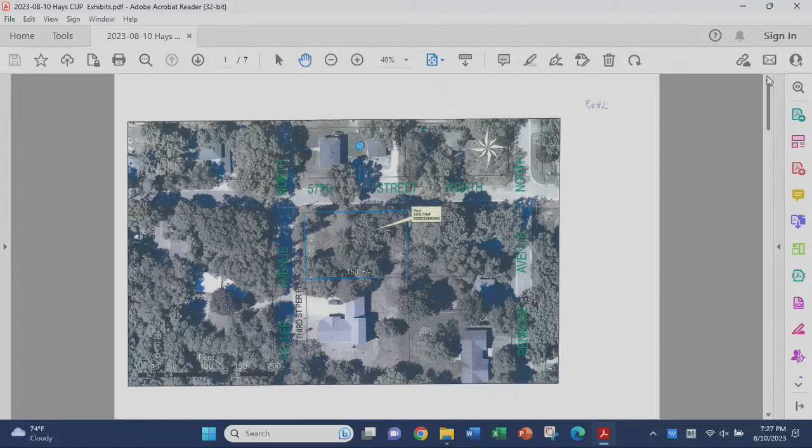Yes, thank you. We do have a request from the Hays for a conditional use permit to allow for front, rear, and side yard setback allowances. This lot is undeveloped and was created by a minor subdivision process. Two lots are created: the subject lot bordering on 57th Street is 14,961 square feet, and the second lot that borders on 56th Street is 30,000 square feet. The address is Peller Avenue for the southerly lot, 5655 Peller Avenue, constructed on that larger 30,000 square foot lot in 2019. At that time, a conditional use permit was granted to vary from the rear setback by the city council. The rear setback would be the north lot line of that property and the south lot line of the subject property—a little confusing with all the streets we've got adjacent to these properties. The property is zoned R1 single family, designated as low density residential in the comprehensive plan. The setbacks in the R1 district require a 30-foot front yard setback, but there is a provision related to averages.

In the case of this lot, we do have a setback on Peller. Peller is considered the front yard, not 57th, because it's the narrowest of the two frontages. But we have an averaging formula, and taking the average of the setback of the Peller Avenue house and the required setback of 30 feet results in a setback requirement of 27.5 feet. The proposed structure is at 25.3 feet, so there is a slight variance in that particular case.

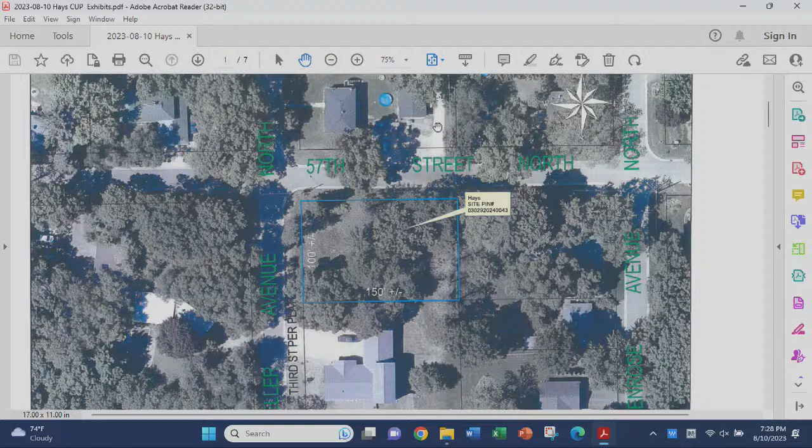The side yard setback is 10 feet, but not less than 30 feet if it's a lot on the corner, so that's the 57th Street side yard setback of 30 feet. They have proposed a porch on the structure that will be 20 feet back, but most of the house is at the 30-foot setback.

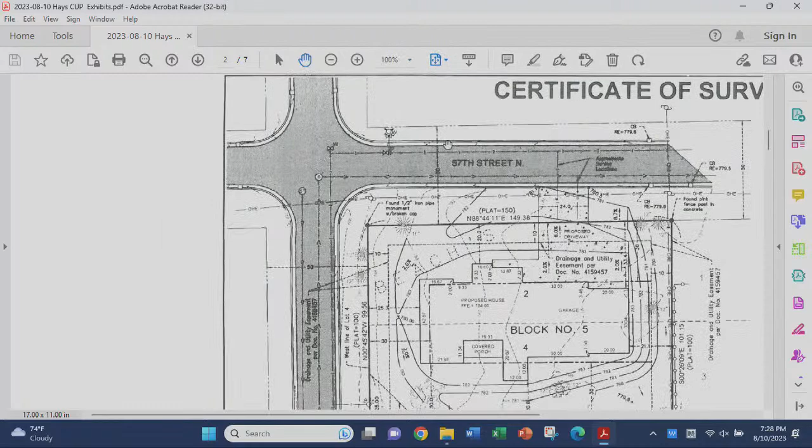The opposite side of the yard, adjacent to 5655 Peller Avenue, has a 10-foot requirement and 20 feet is proposed. The way they've sited this house is to preserve trees on the lot. That is what the survey indicates, some trees that they're trying to preserve, which is why they've situated this house as they have.

The rear yard setback requirement is 30 feet, and the proposed house is at 21.1 feet. Again, it's a fairly long house, designed to essentially meet the needs of the family, but also to try to fit in with the neighborhood to a certain extent.

The review of the criteria is found within the staff report, with a couple of conditions. The trees at the south side of the subject property shall be preserved. Hopefully the applicant has some information for us on what trees they want to preserve and how many, and so forth. The city engineer has reviewed the drainage for the site and does not see really any issues with this. So it's pretty straightforward.

And do you have any questions at this point?

Hi Scott, I have a question. So it's clear that the front for the setbacks is on Peller Avenue, and it has to do with the length versus the width. Right, and the surveyor has it cited, but he shows the setbacks differently because he thinks that 57th Street is the front. Yeah, so 57th is again the side. You can't follow the setbacks that the surveyor shows. Right, okay, I was just trying to be clear on that.

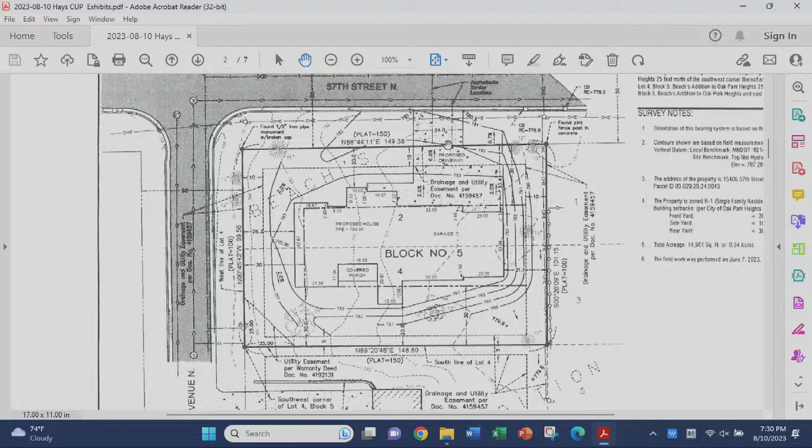Yeah, and then, so the rear setback is the 21 feet? Yes, that's to the east. 21.1, okay. And then, is it clear that the 12-inch spruce that's shown on the survey is part of the trees they're trying to save?

And then there's two 12-inch, some sort of deciduous trees on the south side. Right, that's why I have asked the applicants to clarify, let's get some clarity on that. So they're going to clarify that? Okay, because I have some questions, because there's some grading going on there with what's proposed.

Yeah, there's fill going on there. There's going to be 2 or 3 feet of fill on both of those sets of trees. And I don't know that they're also within 15 feet of the house, so I'm not sure that I see those being able to survive with the grading and how close the house is.

And you think it's wise? Yeah, and well, and then as far as the width with the rear setback, I mean, it's a 4-car garage, which I would love to have, but so anyways, if it was a 3-car garage, it would fit with the setback on the rear. Yes, most likely. But okay, I'm just, those were the things that I noticed, and I wanted to make sure that I was looking at them right.

Very good. So maybe the applicant has some more information about what those trees are and how they're going to preserve them so that they don't die with the building construction. I'd hate to see a variance be granted for trees and then have them die a year from now, or have them all removed. Yeah, and you can't make it subject to that, because if the trees die, the trees die. We can't say that if your trees die, then we're going to have you move your house. It just doesn't work that way.

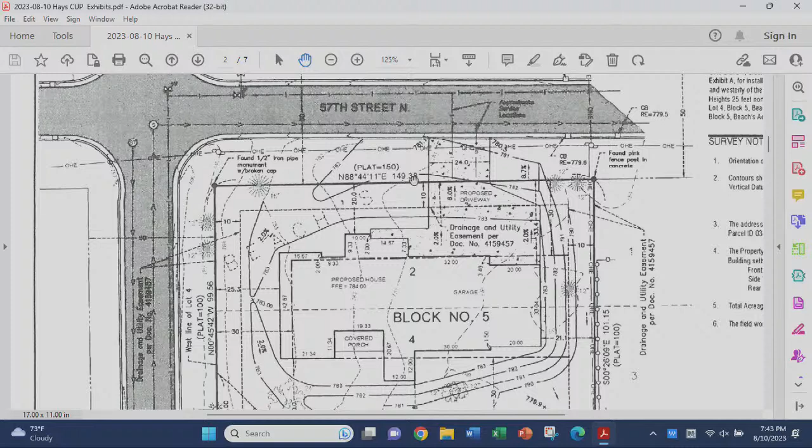They're not impacting the neighbor to the east. Is the reason they need this setback the trees, or is it the placement of the house against the borders of the lot line? You've got a 30-foot setback and a 27-foot setback on Peller. Again, with any corner lot, that limits your ability to build.

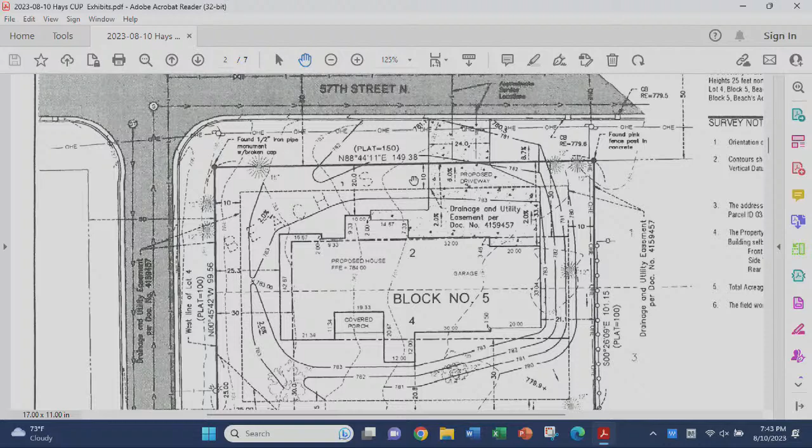Another point to be made, maybe the trees go away, but they do want a reasonably sized backyard also, because if you push the house back, then you restrict that. And really, where's the backyard? When they use this house, the backyard's going to be the south side, because the house is really facing north, even though our setbacks say the front setback is on the west side, but that's really not the front of the house. You look at the design of the house, that indicates the south will be the rear yard.

And I will say this, as somebody with a north-facing driveway, have fun plowing that and all the ice. It'll be fun. I have one of those too. I have a house that looks very similar to this house.

A 4-car garage? No, I wish. We all like the 4-car garage. I don't know about that, I don't think it's... maybe you need to put those wires in the driveway. All right, keep it on track.

So they're intelligently placing the house. The trees might get sacrificed, but that's not why we're here. They've done a really good job laying this out, placing it well. I have zero concerns. The neighbor also voiced his support. The adjacent neighbor to the east isn't here, so there's no input from them. They must like it. I think it's good in my opinion.

I would entertain a motion. I'd move that we approve the request, and we leave out recommendation number 1, that says the property shall preserve the trees. I think that's going to end up being something that might create an issue. So I'd move that we accept the recommendation, or approve the recommendation, without condition number 1.

I'd like to second that so we can discuss it. I have a motion and a second. Call for discussion.

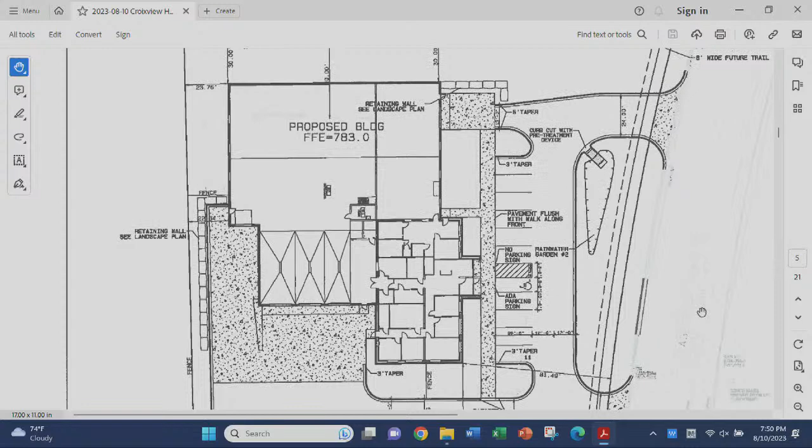Access, really, I believe Mr. Siegfried has had some discussions with the county. They would prefer 1 access point, but I think they may be open to 2. The one thing is if the county decides they cannot have the 2 access points, they'll probably remove the northerly access, and you'll still have adequate access into the parking lot for the front of this site. For pedestrian access, there is a trail proposed along Stagecoach trail that's on the private property.

Eric, remind me, I didn't work directly with that, but there is an easement that has been filed on that, correct? Yeah, the city control, you can see in the upper right-hand part of your screen, denotes that 8-foot trail easement that is not necessarily dedicated to the public, rather it was dedicated for the city. Right, so it can never be assumed that it's for the county's right-of-way, but rather the city controls it. Exactly, for trails or whatever, because that's the way I wrote the easement.

I've read an easement or two in my day, and I don't know that I'd guarantee you it's in favor of the city, watertight. Okay, well, far be it for me to say anything more.

Parking with reduced parking requirements came into effect before this application was submitted. The total requirement now for parking is 17 spaces, and they provided 21 parking spaces. There isn't a huge difference, but we're going through the review process with conditional use permits. This is the first one we've had since that was adopted. The main purpose was to challenge larger development sites on over-parking. This one, where there are a few spaces over, I don't have an issue with.

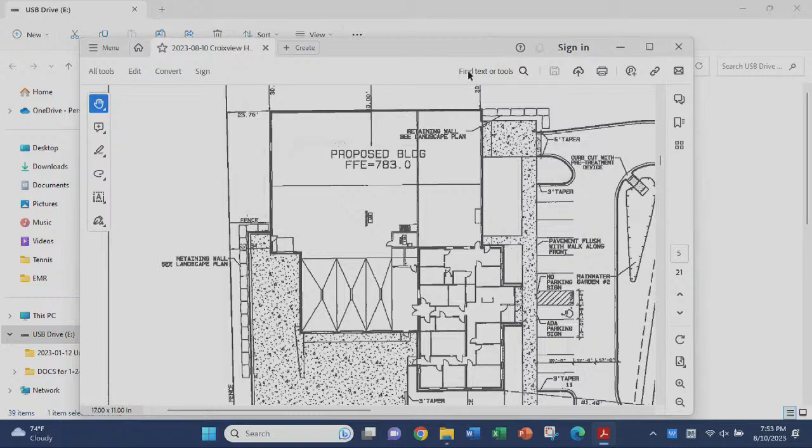Screening: there is a fence to screen the driveway and loading area at the back. The loading area is at the southwest side of the building, so most of the activity and equipment will be concentrated on that part, which is a natural barrier to the houses to the north. There aren't any houses to the west, it's a swamp.

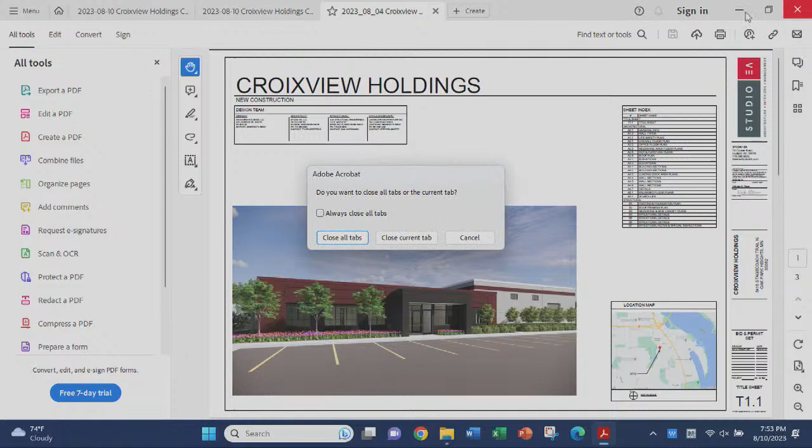The grading, drainage, and utility plans have been reviewed by the city engineer, and Lee's report is in the packet. For lighting plans, we should see a photometric plan as part of the final approvals, and lighting fixtures will need to be all full cut off. We've talked to Mr. Siegfried about that already, and he submitted that photo.

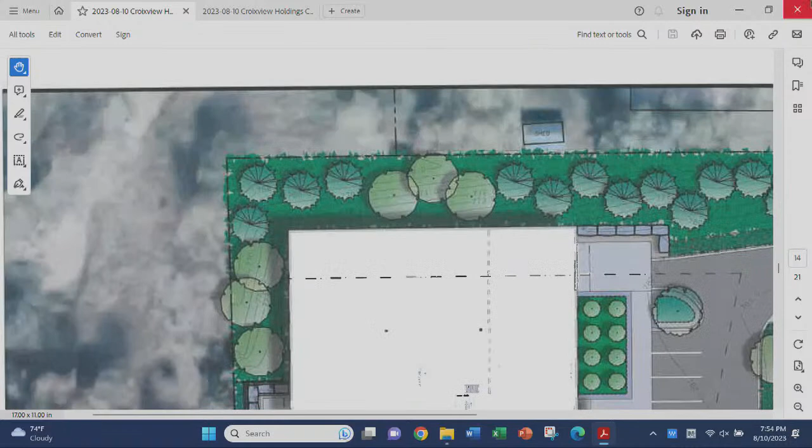For landscaping, the city arborist has provided a review of the landscape plan and the need for additional tree replacement or cash in lieu of. For mechanical screening, Mr. Siegfried has also mentioned that most of the mechanical equipment, air handling and so forth, will be built into the structure itself, so that won't be an issue. But if there is some mechanical equipment, we'll have to look at it at time of permitting.

For noise, there are limitations on hours of operation, keeping the doors shut when vehicles are not moving in and out, and so forth. Those are standard conditions we had before. So with that, there are 12 conditions you can look at.

On design review, I think the building is positive in its appearance. You'll see some additional materials, some color renderings provided by the applicant, which were at your desk tonight. It's a high-quality, good-looking brick building with the warehouse area built of tip-up concrete, but still with some architectural detail. I find that very positive.

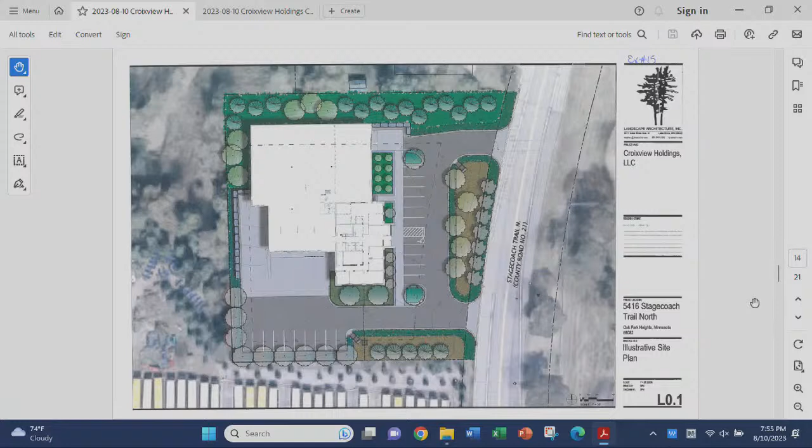Any questions? Any questions?

If the applicant would like to tell us anything, I would offer up the opportunity to speak now.

Before he gets into this, I have a question for you. What is the county's issue with the second entrance? I haven't had a direct discussion with him, but Tim probably has. Comment on the driveways, and just remember to state your name.

Tim Siegfried, one of the Croixview owners or shareholders. I have been in discussions with Ryan out at the county. We're just about there. He just needed some detail for the second driveway, turning radiuses, the type of truck traffic, fire truck in and out access. We need to provide him with one more diagram of how the fire truck is going to turn into the south driveway from the south, because that's where it will probably be coming from.

He has not leaned one way or the other. He seems conducive to two driveways with what we've been speaking on. He has not come back and said we need to show a big hardship, he hasn't claimed anything like that. So I think we're on the road to two driveways. He's reviewed the documents two or three times now at their staff meetings on Mondays. So we're working on that, and I think that's the last piece that's still a little questionable, but it seems good. That's what I have on that.

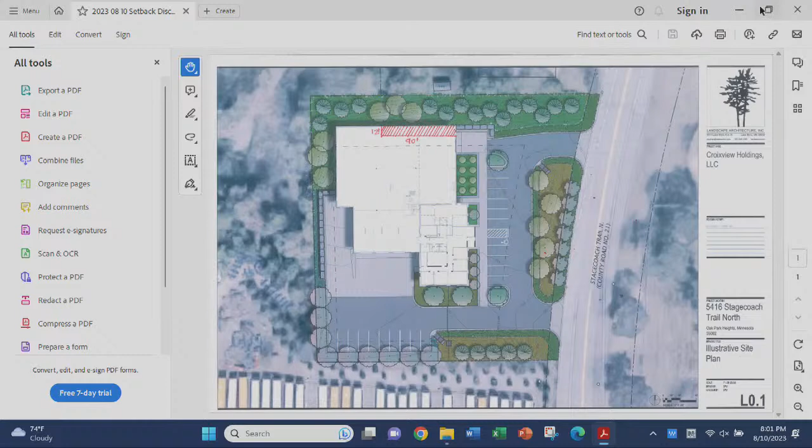Then, Eric, I'd love to jump into the next folder—there's one called illustrative site plan, it's the fourth from the bottom. Go ahead and open up the top one. So that's the same site plan that we've handed out, so everybody's had a chance to look at that one—yep, exactly the same.

It illustrates the green space on site. One of the nice things I wanted to point out is we're doing multiple systems as far as stormwater treatment goes. The entire median island, where you see the darker olive-colored green area, that's a stormwater treatment area.

We're pre-treating the stormwater, then sending it below grade for additional polishing and infiltration. Same on the south, we're pre-treating the stormwater off the surface area of the parking and drive areas. We're using plants to help transpire the water, reduce suspended solids, and infiltrate, and then at a certain point, if it gets up to 12 inches, it gets dumped down to our below-grade infiltration system, which we've designed to be above and beyond the requirements.

We're in the middle of the review with the Watershed District, and everything so far has been received very positively. We're even entertaining talking to them about doing some innovative grant, but we're letting them get through the basics first to make sure we check all the boxes, and then we'll entertain that with them. All that's going really well.

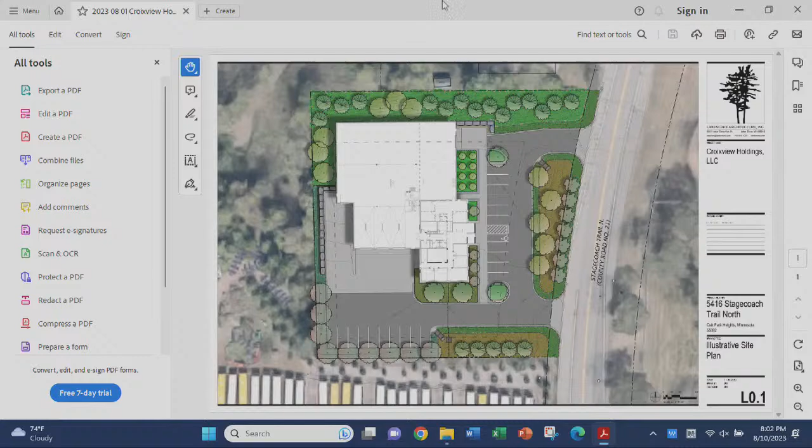The next graphic I'd like to run through. Is this a different file? Nope, same, yeah, right there, perfect.

That's the same section we have here, blown up on a nice big scale. The nice thing to point out about this area, basically the top section on the far right, is that it shows and illustrates to scale the existing rambler for the residential property to the north. There's an existing box elder tree, which we represented to scale, and we have the actual sizes, pretty close within a year or two of when we plant the trees, shown along with the understory screening.

As Scott pointed out, we originally had a drive lane that wrapped around the whole property. There were discussions about limiting parking there for semi-trucks, delivery trucks, or equipment, so Tim and his group gave us direction to make that whole area really quiet, plant it heavily and screen it, and focus the main entry at the other end of the property near the bus yard, to be respectful of the three residences adjacent to the north.

These sections help illustrate not only stormwater in the lower sections, which is basically if you're standing at the building and going right out to a T, but the top section is really nice because it's a cut right through the front part of the site. This is what you'll appreciate and see right up along the building as you're looking at it from the street view.

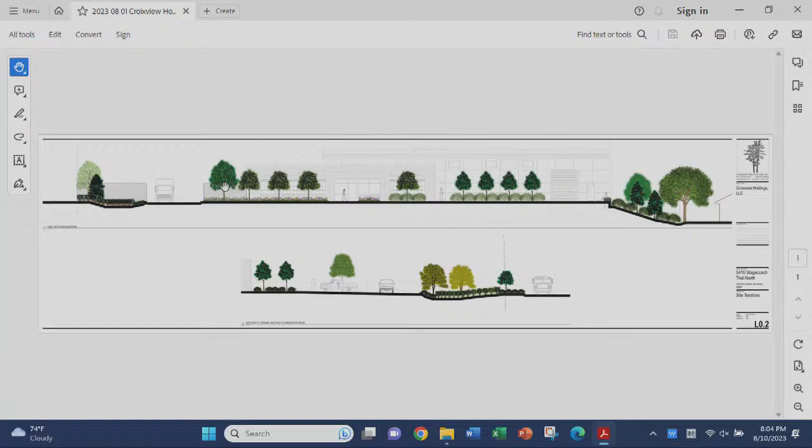One thing we're trying to do, and one conversation we wanted to have tonight, is that we know there's some significant tree cover on the property as it is today. We've got 24 existing trees that would be deemed, according to the city's ordinance, as significant. We're replacing those 24 trees with 63 trees.

We're also putting in understory, per those graphics we looked at and will get to later, shrubs, perennial plantings, and other plants in the rain garden areas that will help with water quality, water conservation, and also provide high quality pollinator habitat. As the plants are drawn right now, we don't have any lawn. We're trying to create a nice, neat, low maintenance corporate look that looks great aesthetically, is easy to take care of, and embraces ecology.

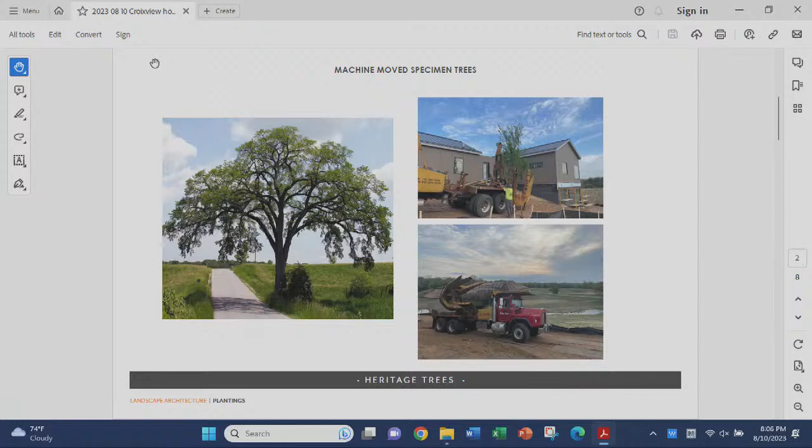We're going to put back the nicest, largest specimen trees that are available in this marketplace. Go ahead and jump to the next one, Eric.

Just wanted to show you that we're doing everything we can to try to repopulate, revegetate, and really replace kind of what's there right now. It's kind of a beautiful site that looks more like a park, so we're using all the tools at our disposal to make up for that.

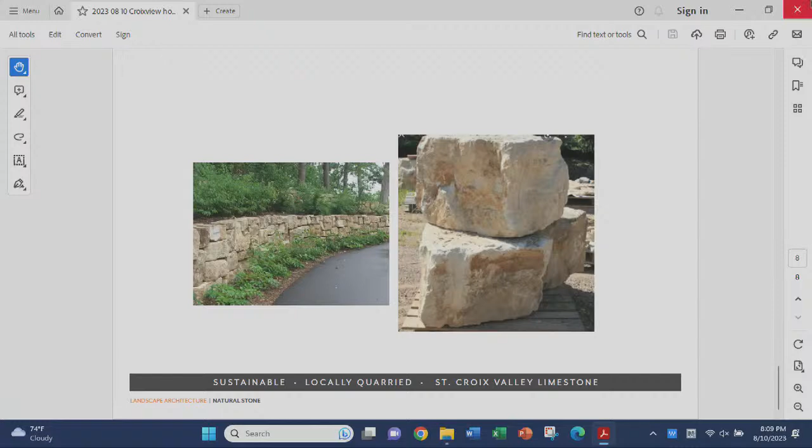Okay, I think that's all for this presentation. I think the main thing I wanted to talk about was the setback as it relates to the residential property, and it sounds like there really isn't one. Is there any action or anything that needs to be talked about in greater detail tonight?

The Planning Commission will discuss if they have any issues with that.

And then the second thing, which doesn't relate to that and isn't on the docket per se, is talking about the landscape ordinance as it relates to tree replacement. Right now, as it's proposed - let me grab my paperwork here.

So this is an item that doesn't have to be solved today, because we're probably not going to be able to replant this stuff till next spring anyway. But we did our best to repopulate the site with the 63 trees to replace the 24 trees.

We don't have any what we call high quality, long-lived heritage trees on site - no oaks we're taking out, no maples, even sugar maples, no white pines, things of that nature. The bulk of caliper inches here are silver maples, a handful of green ash, which are included in those 24 trees we're taking out, because according to the city's ordinance, even green ash are considered significant trees still.

So we wanted to have a conversation about that to say, from our perspective, we know we have the code that says we've got to replace X to X. We've got kind of a unique circumstance here with the type of site and the project and program that we have - it's difficult to achieve that with the caliper inches of all the soft maples that we have on site.